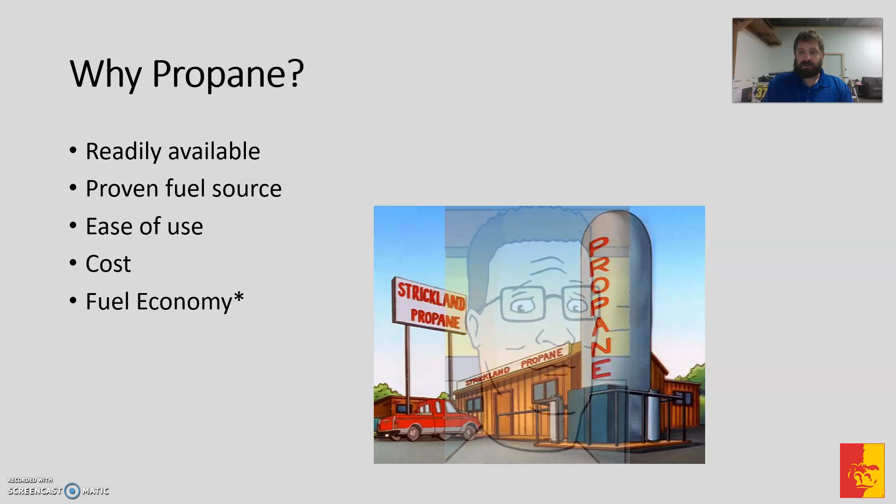The generator I'm using is a 3,500 watt Champion, commonly available. I found them at Walmart.com for $429. My unit was purchased at Cabela's right after the first of the year on sale for $399. So this is not an expensive unit. It's easily affordable for most people looking for an emergency power solution, or a solution for an RV or boondocking, perhaps a hunting cabin where you need remote power. It's got a 2.5 gallon fuel tank, which will come into play here after a while.

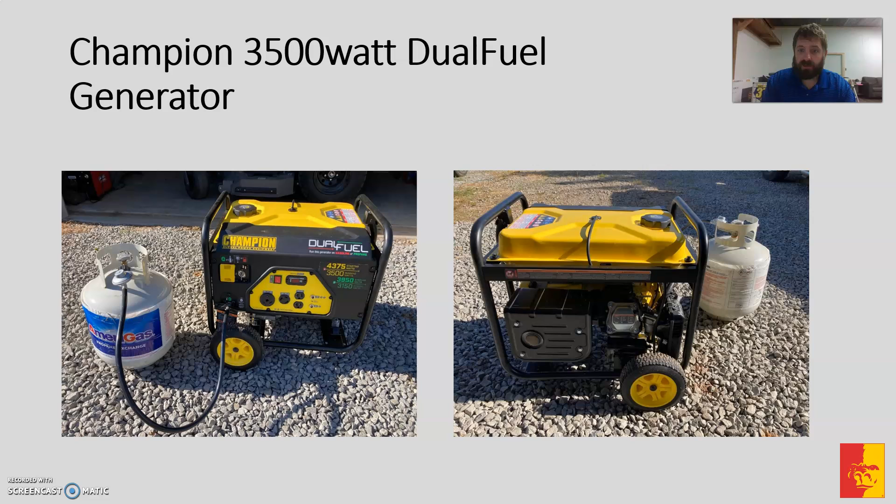Earlier we mentioned ease of use, and what I'm going to demonstrate in this video - I'm going to narrate it, so it may be a little bit clunky at first - is how to go from gasoline to propane on this unit.

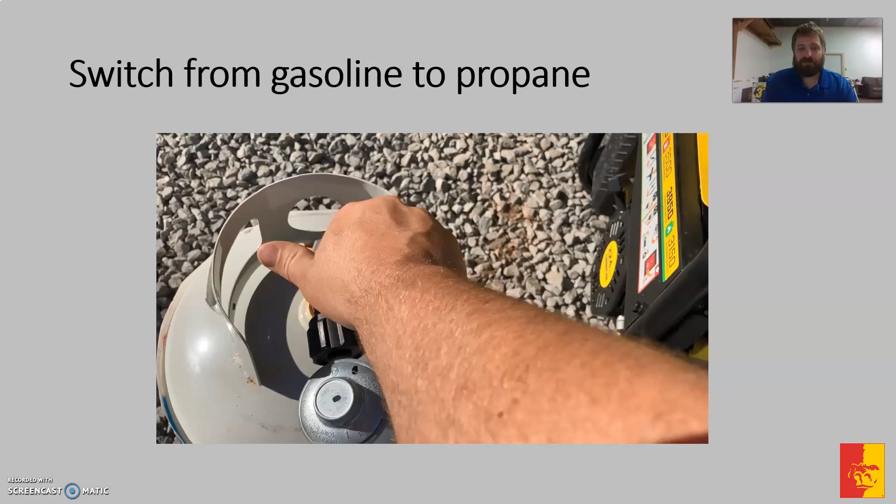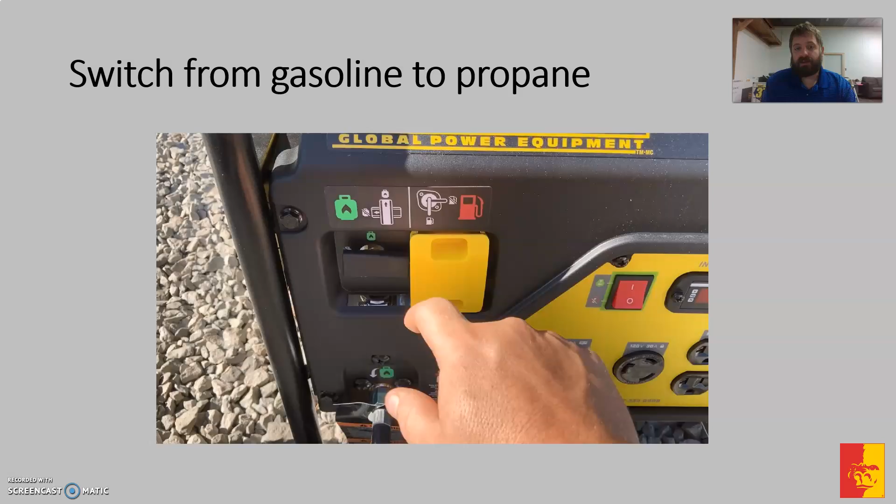The first thing is you've got your cylinder on the left-hand side, and you'll see my hand reach down in a minute - we're going to open up that valve. That's the first step, with the engine off, to starting this unit on propane. Once the valve's open, the propane is free to flow through the included hose. Now we're going to turn the fuel off with this fuel petcock. Once the fuel's turned off, there's a physical cover that slides over, and now you've got your onboard propane hand valve. You've got to open that up to get propane to the unit.

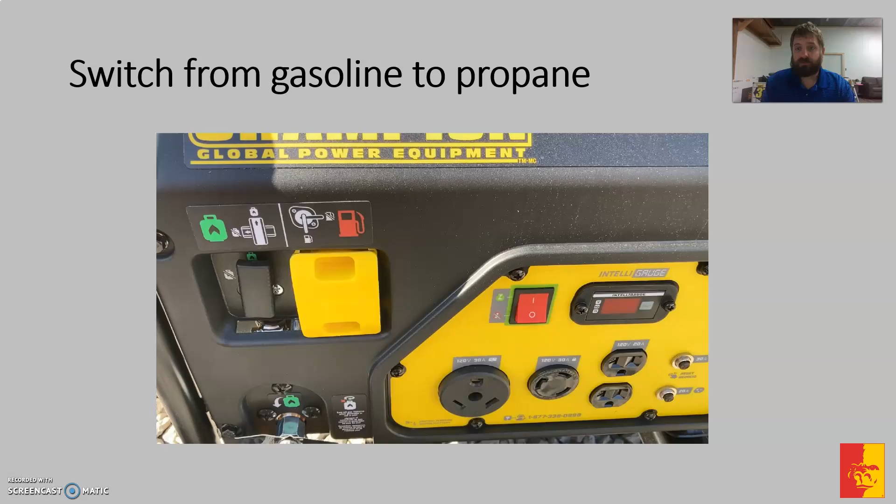Just like any generator, you've got a master on and off switch - make sure that's on. Now this unit is ready to fire up. This is a pull-start unit; some higher dollar units are electric start. This one's pull-start, but it is ready to go at this point.

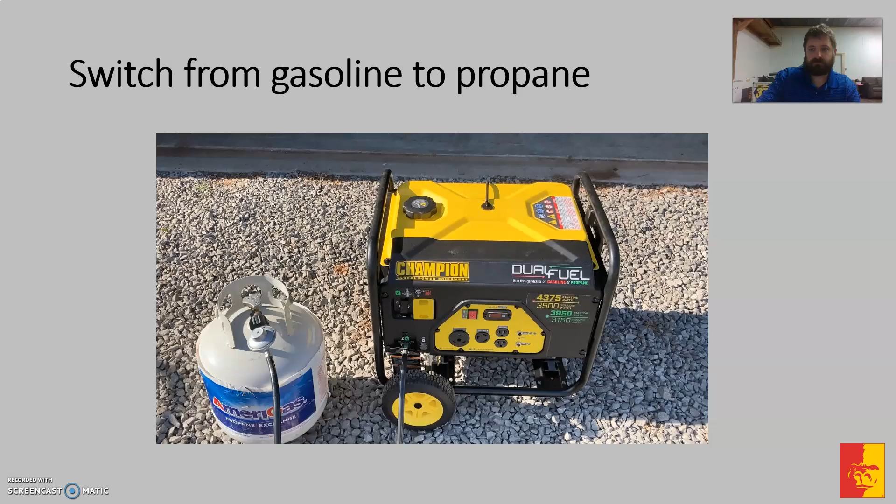On the 1 gallon test, we'll need to put a higher load on this unit, so that's where the toaster oven comes into play. We'll do four 10-minute runs, so 40 total minutes that toaster oven will be running during the 1 gallon test. This provides additional load, and as you'll see, this generator can run a long time on 1 gallon, so just for the sake of speed, we needed more load for that test.

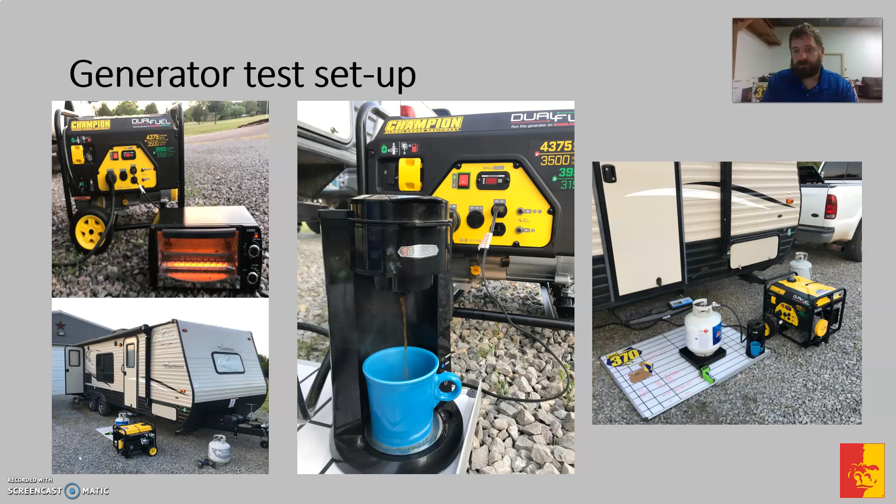So, gasoline, our 1 pound test run. The carburetor needs to be filled up. Prior to doing this run, I made the mistake my first time around of pouring in 1 pound of fuel without filling the carburetor first, and it didn't run very long, about 10 minutes. So I assumed a 1 gallon run, which is 6 pounds, would go about 60 minutes. Easy math, right? However, that was wrong. I kept running and running and running, so I decided to start over and revalidate my 1 pound test run by filling the carburetor first.

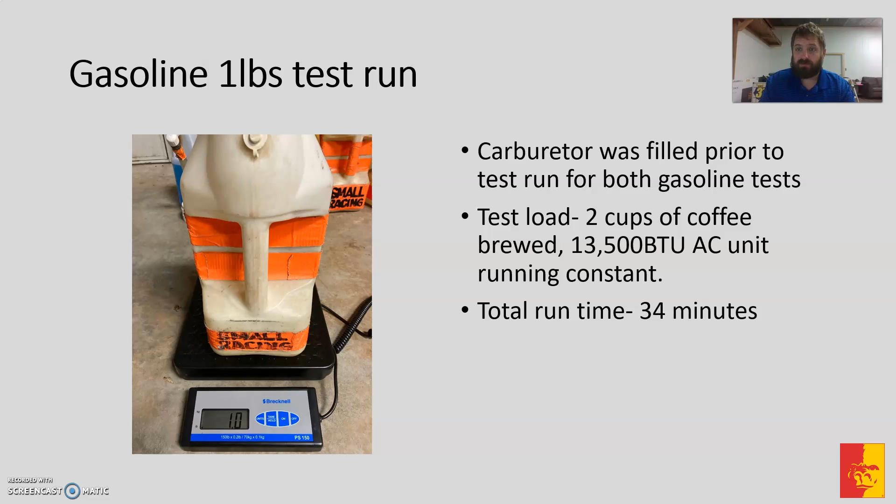This yielded 34 minutes of runtime with that test load, the 2 cups of coffee and the 13,500 BTU unit running constant. You can see my scale on the left-hand side. Yes, I did account for the tare weight of the gas can before weighing the fuel out. Just know I use this scale throughout to check weights.

The propane 1 pound test run is a lot more interesting because you have to physically watch the scale count down from 32.2 pounds to 31.2 pounds for your 1 pound test. Same load, 2 cups of coffee, the air conditioner running constant, and this yielded 31 minutes. If you remember, gasoline was 34, this one's 31. So a little bit less, but still pretty comparable, not very far off. I thought there'd be a bigger difference.

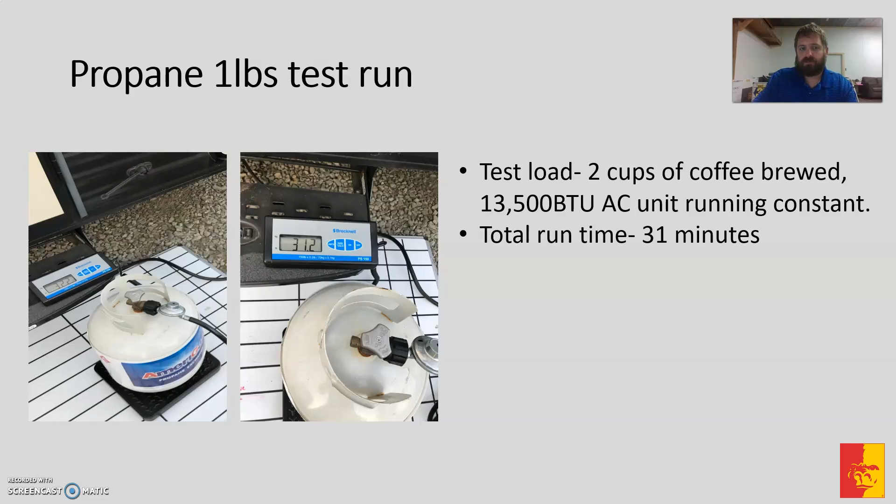Moving into the 1 gallon test run, this is where I think the most accurate data comes from. The carburetor needs to be filled. You can see my test load is now increased to include those 4 toaster oven runs, and it actually did include 3 microwave runs as well. My total run time is 3 hours and 54 minutes. That's a long time to sit there and drink coffee.

234 total minutes. The math on that comes out to 39 minutes per pound of fuel burned. We'll come back to that 39 number in a little bit for comparison to propane, but just start thinking about that as we move through the propane slides.

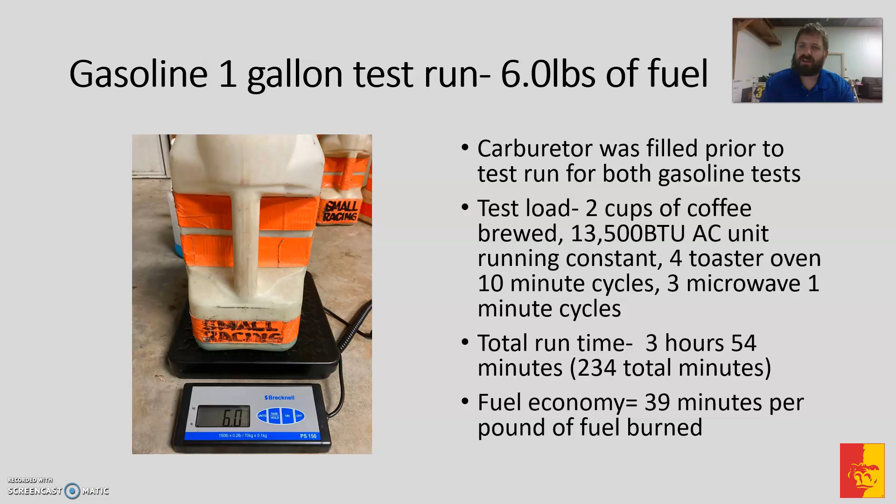So propane, here's your 1 gallon test run. I've got a quick little video here, similar to the last one, except I'm going to let the narration be in the video itself.

Okay, got the 2nd cup of coffee brewing on the propane test. We started at 32.2 pounds, we're down to 31.6. So we've done the heat checks, starting to watch the scale to make sure we get that right. We're doing the carbon monoxide checks next.

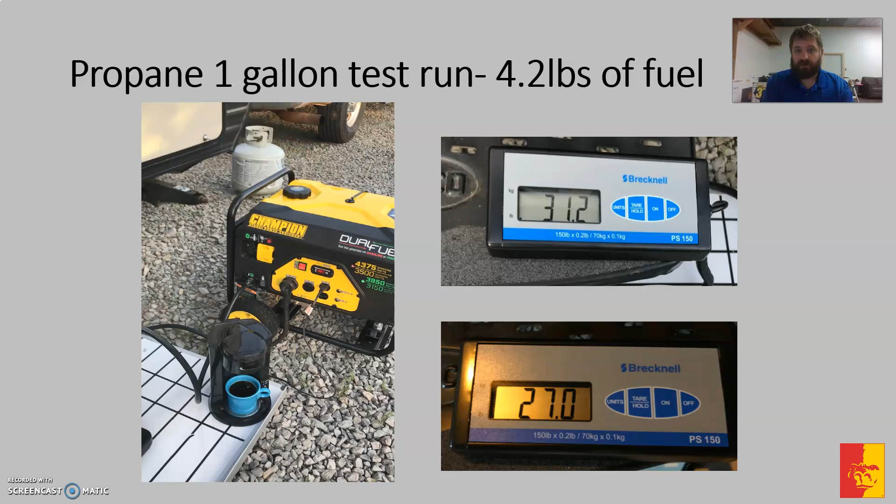Okay, so you got to see the generator running and finishing up a cup of coffee there. You can also see my scale where I started at 31.2 pounds and ran it down to 27 pounds. So that's 4.2 pounds of fuel consumed for 1 gallon. Quite interesting, the results of that, and we'll get to that in the next slide.

So here we have a blown up version of my whiteboard. I wanted to pull up the real version. I chose to go old school instead of using a spreadsheet, so we've got a pile of data on here. It's not important to actually read it. I just wanted to show that if you're going to do this test, you can draw quite a bit of data from your scale readings, and I do suggest using a program like Excel versus doing it on a whiteboard. However, I had the whiteboard there, and I was sitting there drinking coffee for minutes and minutes and minutes, so that's what I did.

The total runtime with that constant load was 2 hours and 48 minutes, so 168 total minutes. The fuel economy on propane is 40 minutes per pound of fuel burned. So we got a little bit better fuel economy out of the propane when we went to the higher load and longer sustained load operation.

Now, the video that I just showed a minute ago introduced our final two tests that we're going to look at.

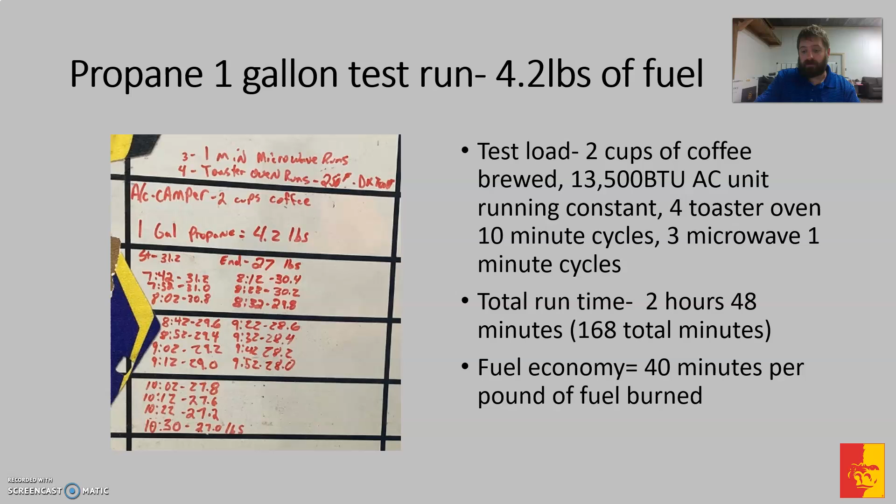Exhaust temperature can be more important for a slimline dual fuel unit that's maybe mounted on the underbelly of an RV. You're looking to keep any heat load off that unit. They're usually not that well insulated, so the more you can help your air conditioners out, the better.

I took these readings from about 2 inches away with an infrared temp gun. Probably not an exact science to get the number, but what I'm mainly concerned with is the delta between the two. So you can see our average of 5 readings: 326 degrees on the propane and 307 degrees on the gasoline. So the propane burns a little hotter, which may affect your decision, or what kind of generator you want to buy—like an underbelly mounted one, or one that you roll around outside like mine that I showed earlier.

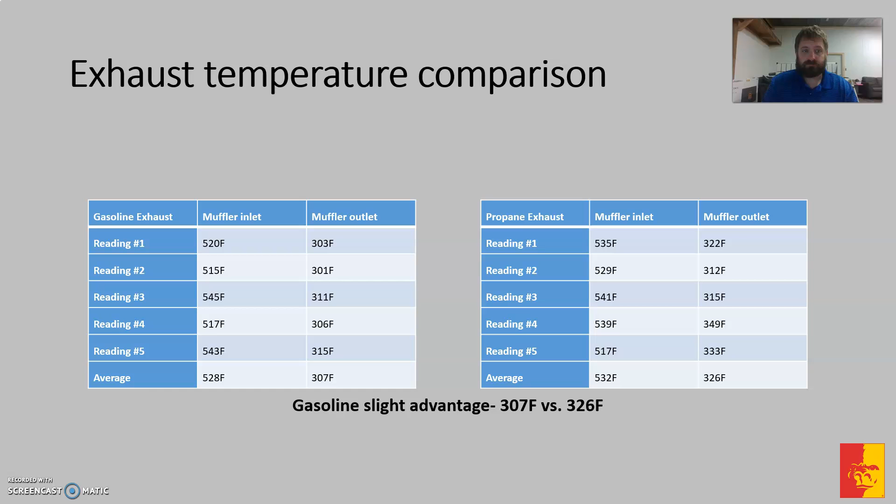So carbon monoxide output—why is CO important? Carbon monoxide is a silent killer. You can't smell it, you don't know when it's hit you. A lot of these small generators are used in camping situations, so sleeping in your camper, you get exhaust fumes in there. It can be deadly, it can be fatal.

However, most RVs are equipped with a carbon monoxide tester, so RVing is not such a big deal. But boondocking, maybe at a hunting cabin, we're using this for remote power—if you've got it up close to your cabin or house, it's very important to keep these things well ventilated.

Same kind of thing, took 5 readings of each. I made a homemade wooden chute, 18 inches long, which kept it spaced away from the exhaust but directed the exhaust flow directly onto the inlet port of the handheld tester. I would need a gas analyzer, like a 5-gas analyzer, to really look at the exhaust gases, but I'm going for the delta here, just looking at a difference between the two fuels.

And what I found was quite a bit of difference: 596 to 600 parts per million for propane, and 802 parts per million for gasoline. So the propane did burn a little hotter, if you remember the last slide, however it burned a little cleaner when talking about carbon monoxide. In my opinion, propane would be a better choice if you're using those two categories, just due to the fact that you have less carbon monoxide. Carbon monoxide is very dangerous—that's why I included it in this test.

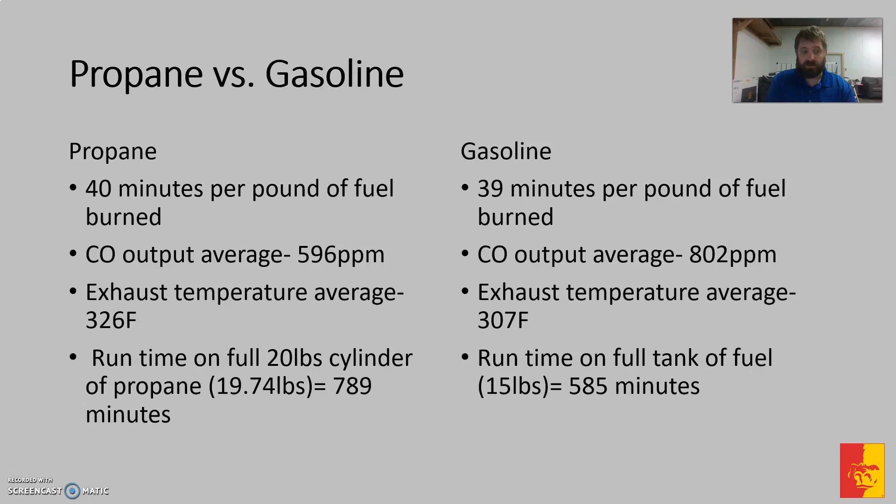So for me, I don't like to get up at 3 o'clock in the morning and refill the gasoline on a generator. So that bottom bullet point outweighs a lot of the other bullet points for me when it comes time to choose a portable generator.